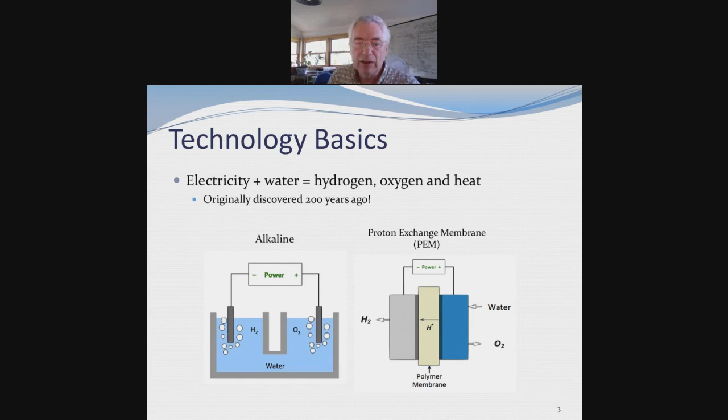So why now? There's really been a revolution that's occurred, and that is wind and solar costs have gone down. We now have a very low cost, low carbon source of electricity. It really didn't make sense to use electricity to make hydrogen if that electricity had its own carbon footprint.

These two things are expected to continue as we depend more on renewable electricity for our sources of electricity in total. So that's the message I want to leave you with: if we're going to depend largely on renewable electricity, we're going to have these big surpluses, and we either throw it away or we use it to make hydrogen, and that's why we're talking about hydrogen so much today.

And with that, I will turn it over to the real experts who can talk to you about hydrogen transportation.

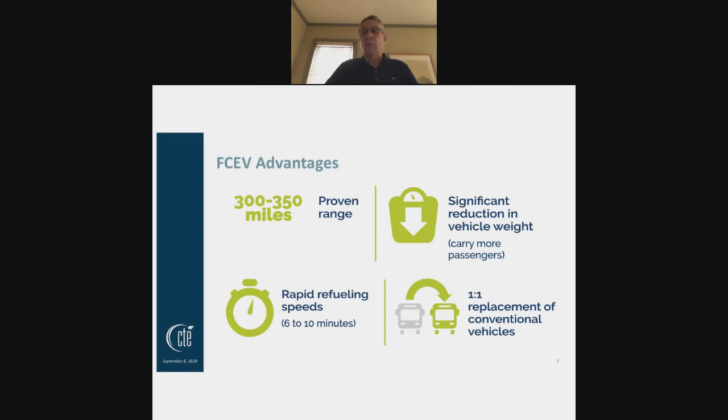As I previously alluded to, these are the four key fuel cell advantages: proven range, here in this case we're talking about transit buses, 300 plus miles, but we're also looking at trucks, heavy duty trucks at range of 500 miles or more; reduction in vehicle weight to carry not just more passengers, but also freight; and rapid refueling periods that allow you a one-to-one replacement of conventional vehicles and operating within the same fleet fueling parameters.

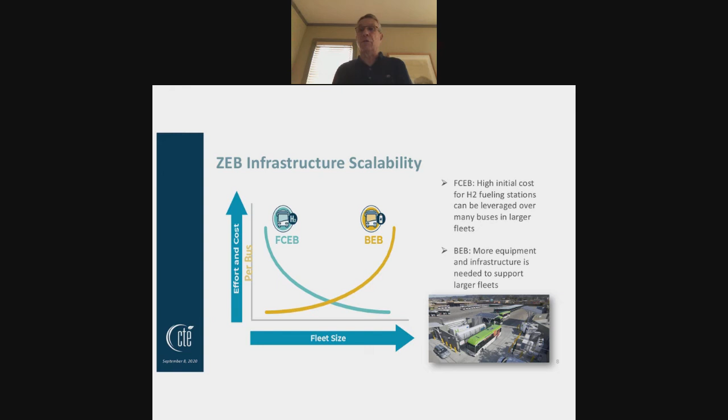The challenge with battery electric is that it's much cheaper and easier to start out, but scalability drives the costs up with respect to providing grid power, whereas for fuel cell buses, the infrastructure actually becomes much less as you scale up to larger fleets.

That transition from battery electric to fuel cell electric is really being recognized by transit agencies who wrote letters—18 agencies here in California—to the California Energy Commission, saying we need hydrogen as part of our transition plan to zero emission. So many are now featuring both fuel cell and battery electric, recognizing that it's going to take fuel cell transportation in order to do that.

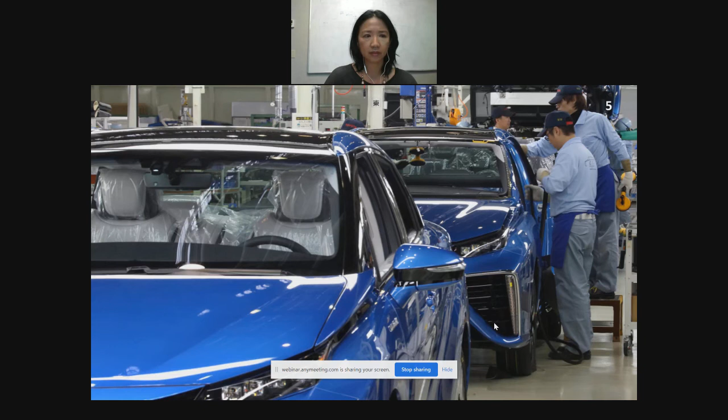But what about the fuel? It's not well known that hydrogen has been an industrial commodity for decades, and the U.S. produces 10 million tons of hydrogen per year. Most hydrogen is used for oil refining and for making fertilizer. So this large-scale industry of production exists. The challenges are getting it into our customers' vehicles and increasing renewable generation.

Our Mirai customers tell us that they value consistency and familiarity, and for them, the refueling experience mirrors that of a gasoline vehicle. It's simple and consistent across stations. With a quick fill occurring in less than 5 minutes, while providing over 300 miles of range, our customers won't have to rearrange their day to be on their way. And furthermore, it doesn't eliminate those in city centers or without access to at-home charging.

In California, Toyota coordinates with the many station providers that make up our current network of 40 retail stations. While early stations had one nozzle and were undersized, the stations coming online now will meet the demands of the growing market with 4 times the capacity and multiple fueling positions. This high output is good for our customers' wallets and for their peace of mind.

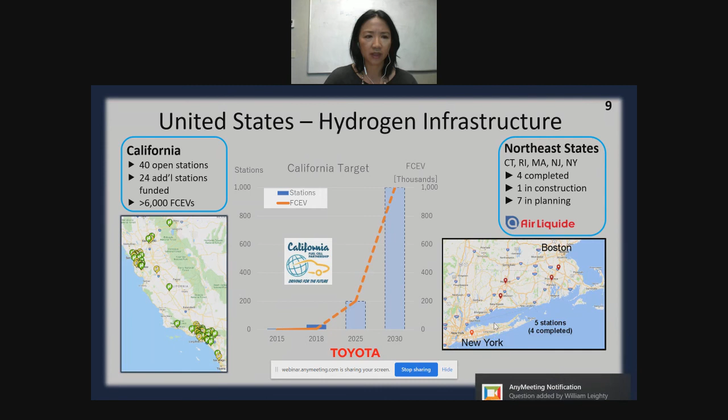The future of hydrogen infrastructure is bright. 24 new stations have been funded, with additional grant money allocated for a next wave of stations. With a projected 200 stations by 2025 and 1,000 stations in 2030 in California alone, the chicken and egg argument can finally be put to rest. In addition, 5 Northeast states will be receiving stations in the near future.

But no conversation about increased hydrogen production would be complete without recognizing the influence of heavy duty on the light duty market. And in fact, the two are synergistic. Large hydrogen vehicles have about 40 times the fuel consumption of a typical Mirai, and their greater fuel demand drives down the cost of fuel for both classes of vehicles alike.

To that end, Toyota is currently building 10 Class 8 trucks in coordination with PACCAR after already accumulating thousands of on-road miles. With an 80,000-pound gross vehicle weight rating, 300 miles of range, and 560 horsepower, this truck means business. The trucks are currently in an evaluation period throughout 2020.

And to feed these beasts, 3 new heavy-duty stations help complete a 5-station network in the LA basin. 3 stations will be built in coordination with Shell with over 1 ton capacity per day. And 2 existing stations were built with Air Liquide, creating a necessary redundancy around the ports.

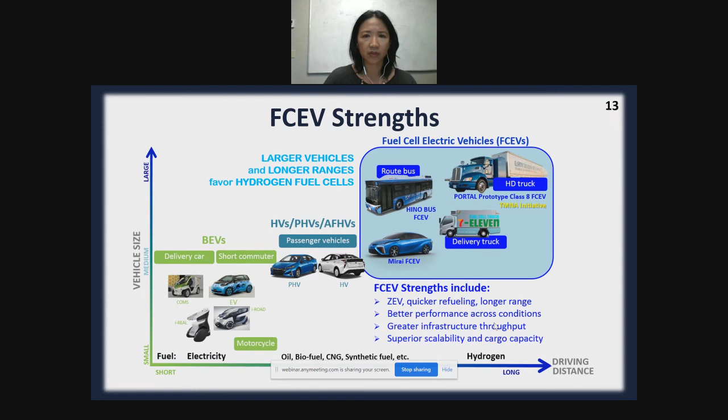At this time, Toyota has multiple projects around the world, both immobile and mobile, demonstrating the modularity of the fuel cell technology. Beyond the Mirai, projects include forklifts, buses, ships, stationary power, and delivery trucks.

In Paris, London, and California, Mirai is being used successfully in fleets because it enjoys a high uptime, resulting in fewer vehicles needed, low operating costs, and a long warranty for trouble-free service, long range and quick refueling time, and access to emissions-limited city areas such as Paris and London and others.

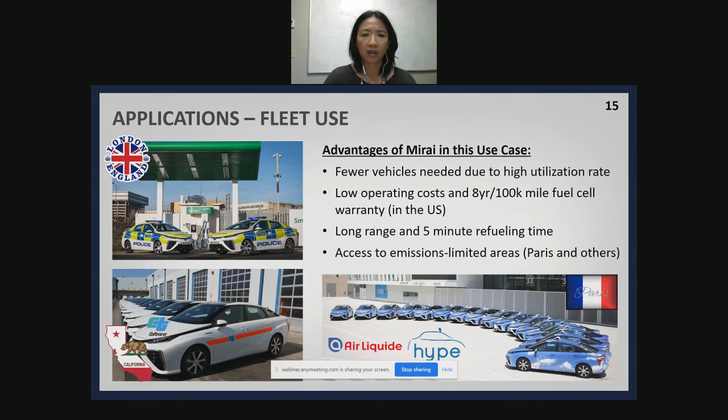The Mirai has also demonstrated backup power capabilities using a CHAdeMO connection and Honda inverter. Last year, 4 Mirai powered the electrical equipment at a U2 concert in Japan. And here in SoCal, 2 Mirai have been used to supply up to 18 kilowatts of quiet power to support healthcare workers at a COVID test site.

And now for something special, the next generation 2021 Mirai.

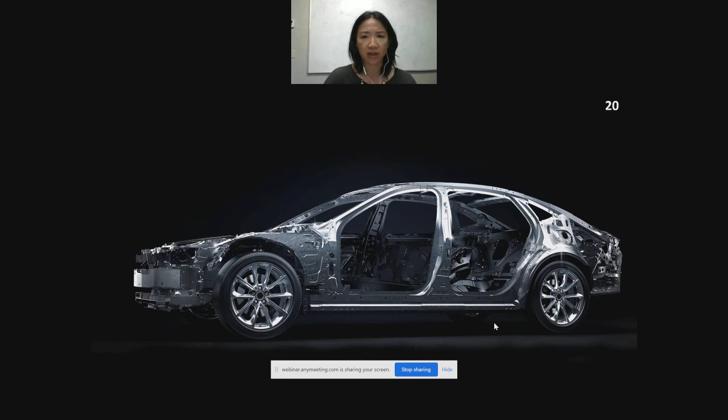We wanted to dispel the notion that eco-friendly cars are uncool or incapable of fully replacing a gasoline engine. An all-new premium rear-wheel drive platform makes the Mirai larger, wider, and more aerodynamic than its predecessor. A strong focus was made on outstanding driving characteristics. With a low center of gravity and optimized handling, this sporty and elegant-looking Mirai takes on corners like no other Toyota.

The interior is modern, not only in styling, but in available technology, with an immersive multimedia touchscreen and 14-speaker JBL system. With extensive repackaging, we also added a rear middle seat, making the Mirai a true 5-seater sedan.

While I can't share too many other details, I can highlight maybe the most important new feature. Thanks to fuel cell improvements and a larger hydrogen storage system, the range is targeted to increase by more than 30% over the current model.

Our goal was to make a car that customers want for design and driving performance that just so happens to be a fuel cell vehicle. And that's what we believe we've achieved in the 2021 Mirai, available at the end of this year. So in more ways than one, the new Mirai is a significant evolution of technology and an important preview of what's to come in Toyota's lineup.

Today I've explained how Toyota is expanding its fuel cell portfolio by powering mobility solutions of all sizes. And with improvements in fuel cell technology and increased hydrogen production, Toyota will increase its global impact to a zero-emission world together. Thank you.

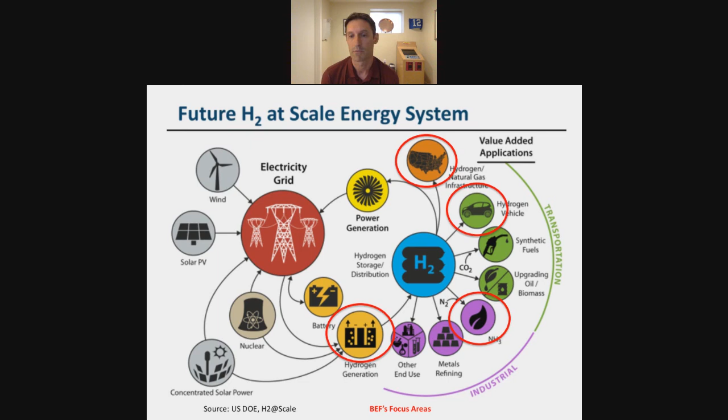But I've circled here in this graphic the main areas of focus for BEF, and that is on the production side. How do we use the electrical grid and how do we generate this renewable hydrogen from electricity? But then also, how do we figure out how to develop the markets for natural gas injection for vehicles and then for ammonia there, which is NH3.

And what we've started doing is we started looking at what is the current set of market conditions that we're working with, and what are the costs that we can produce this hydrogen at, and where are the nearest term business opportunities for someone who wants to generate hydrogen and then utilize it. And so we commissioned some market analyses, and we had a cost model developed. So now we're able to figure out what is the levelized cost of hydrogen production given various inputs of electricity price and utilization rates and so on.

A lot of folks are talking about the transportation sector, and that is one of the best near-term business cases for renewable hydrogen because of the relative market size of transportation fuels and how much we use as a society. But then also some policies that are in place, like low carbon fuel standards, and also the relatively high cost of gas and diesel relative to the other natural gas end uses that hydrogen could supplant.

So talking about hydrogen costs here, if you had about $3.50 per gallon of gasoline, you're at about an equivalent of an $8 per kilogram of hydrogen fuel. Obviously gas prices have gone down lately, but they do fluctuate over time.

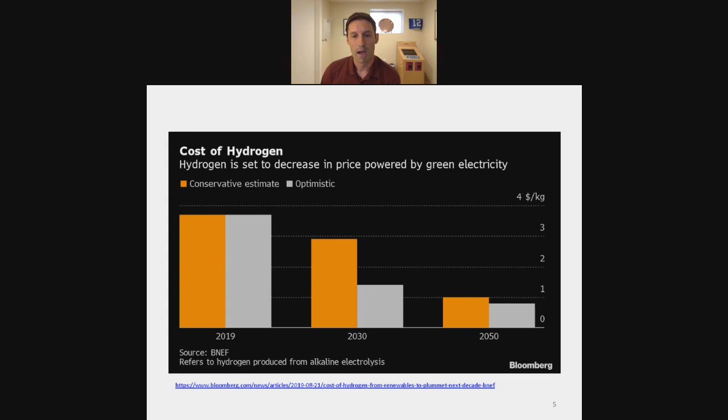This is a graphic from Bloomberg New Energy Finance, showing projections for where the cost of renewably produced hydrogen will go over the coming decades. Out to 2050, they're showing that renewable hydrogen could be under $1 per kilogram - much, much cheaper than existing gasoline prices, and completely renewable. Also, under $1 a kilogram would be under the current prices of fossil natural gas for the most part to make hydrogen.

However, we have policies that are encouraging clean fuels and clean transportation, like Oregon has a clean fuels program here where we're located in the Northwest. California has a low carbon fuel standard that operates very much the same way. And these programs provide substantial value for renewable fuels like hydrogen, and can really help make the business case, especially in these early days of market growth.

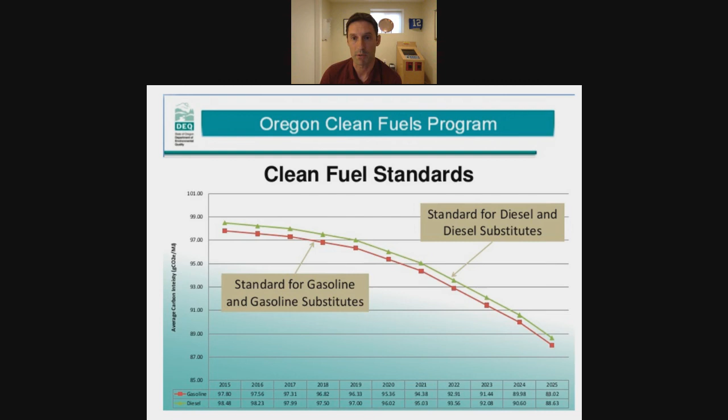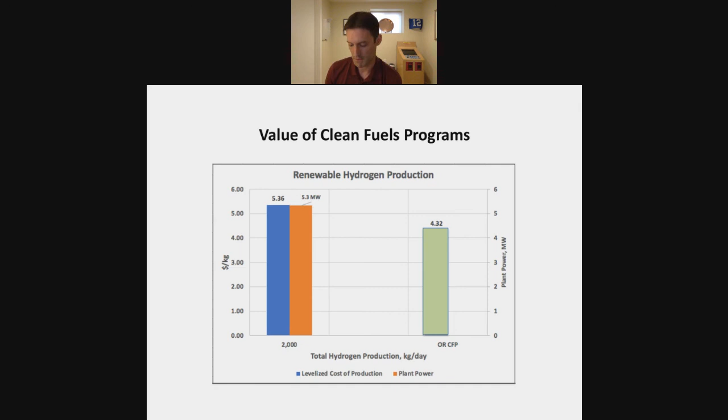As Jaimie mentioned in his presentation, the demand side of this equation is really one of the bigger things we think we need to focus on - growing the demand and the amount of end users of renewable hydrogen. Because as we've found, the production of renewable hydrogen is not really the difficult part. It's whether we have enough of a market pull to produce this renewable fuel at scale.

So globally, there's been a ton of activity lately. I wanted to touch on this global movement before I get to some more local stuff. There's also been a ton of policy development lately that we didn't really get to touch on across our panelists. But Europe and Asia have tremendous goals and tremendous volumes of renewable hydrogen they're planning to produce and use as part of their green initiatives.

Recently, Air Products announced with some other partners a project in Saudi Arabia that would be the world's largest green hydrogen plant, set to come online in the next 5 years - a $5 billion plant that would be able to fuel over 20,000 buses.

Australia has been very highly prioritizing renewable hydrogen for export. They have great renewable resources in Australia, and they have about 5 gigawatts of planned renewable capacity that will produce renewable hydrogen for export to Asia, as well as connect via a transmission line to Singapore.

The Los Angeles Department of Water and Power is a municipal utility that serves LA, and they've got a $1 billion project in Utah where they'll be storing vast amounts of hydrogen in an underground salt cavern and then burning that in a combustion turbine to firm up some of their power supply and help integrate new renewables that are coming online there.